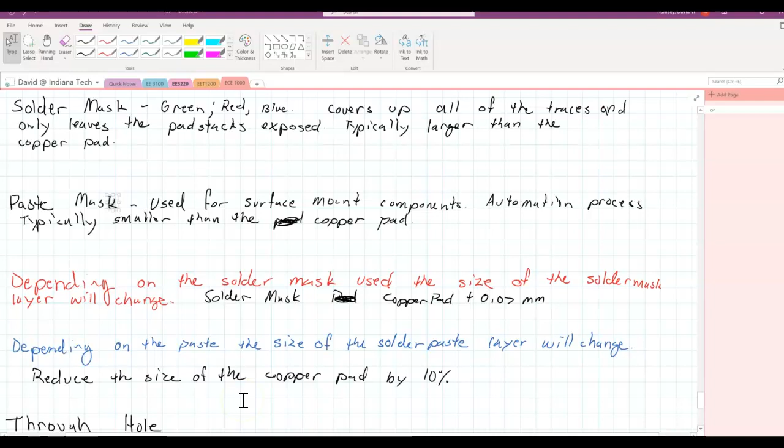Okay, so this last video for this week, we're going to actually look at doing a pad stack for a surface mount component. Now, there's one thing that I need to fix. I made a very critical error when I talked about the naming convention. So hopefully you're watching all the videos.

The naming convention here, I forgot that the way that it actually works here is that, let me scroll back up here a little bit. And I'm going to write tiny here. It's plus capital H plus hole diameter. Because otherwise, the reality is these numbers run together and it can lead to confusion. So the reality is this should have been 150H90 is what it should be.

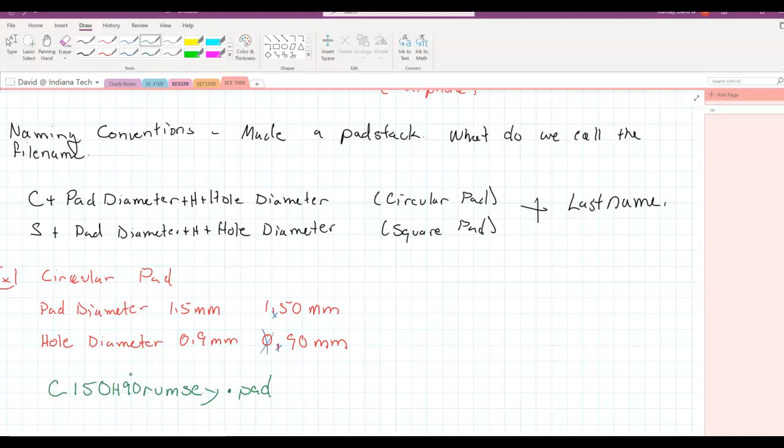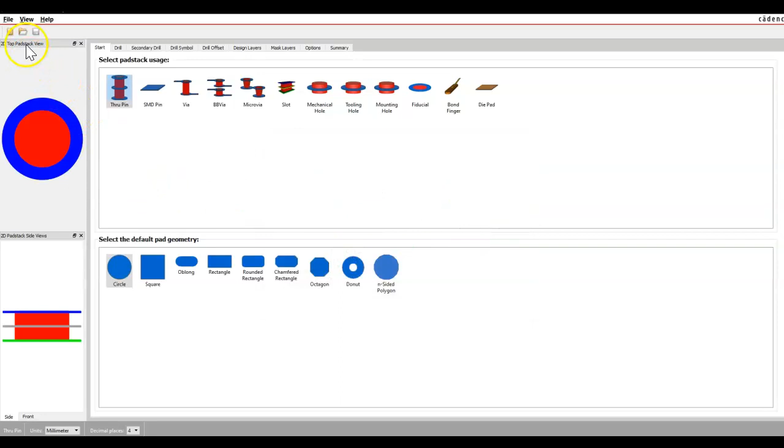And so for the one that we just made, if I open my pad stacks, where are my pad stacks here? The one that I just made here starts with a C. This one right here. I should have named it as C130H, and they say capital letters. It doesn't really matter if they're capital or lowercase in reality, but C130H90.

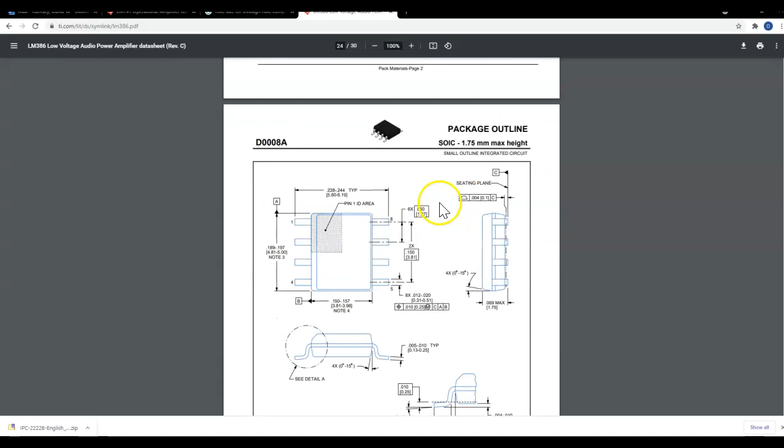Okay? So now, as I said, what we want to do is we want to now get on to doing surface mount components. Now this data sheet is actually for an LM386. This is a really good data sheet. Gives us a lot of examples here and a lot of information. Because actually, if I scroll up, this is actually the dimensions of the component. But that's why I like to look at everything, because if I scroll down a little bit more, here's even an example board layout. And so it says land pattern example.

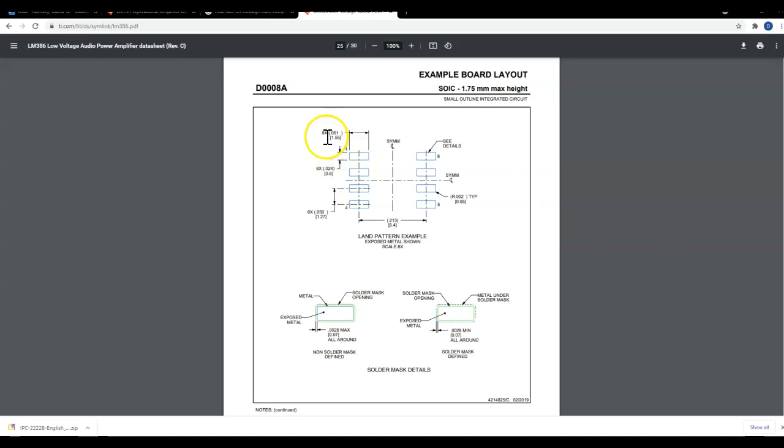So exposed metal shown. And so these basically give you precisely what it is. And this 8x just means it's 8 times, meaning that each one of these are the same dimension. And 6x, well, that's because there's 6 of these dimensions in here. So we also need to make sure that we see linear dimensions are in inches and then brackets are in millimeters. Okay. So we're going to, again, use millimeters for this pad stack. So I'm going to go here and I'm going to do a new.

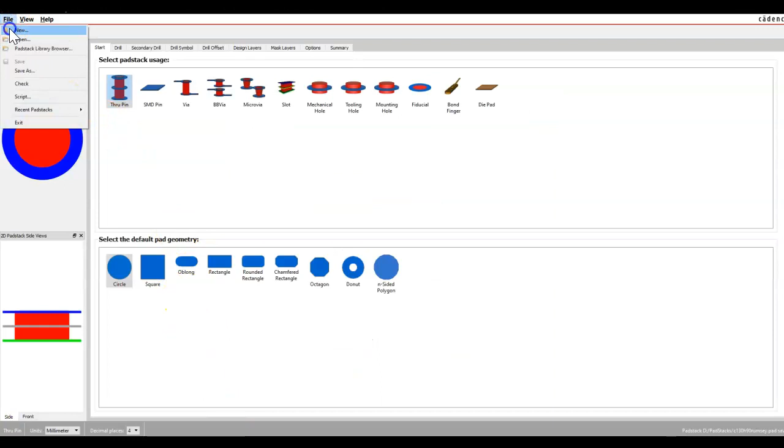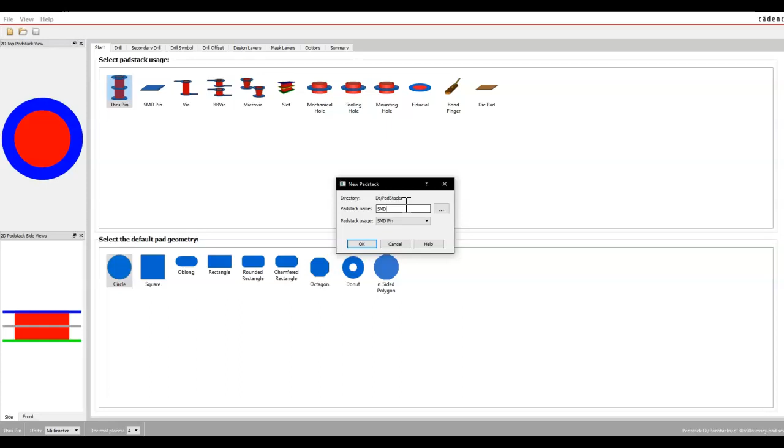And by default, pad stack usage, all that does is it's just going to select this for us automatically. Now, for an SMD component, it's SMD, which stands for surface mount device, and then the naming convention that we're going to follow here is we're going to do the width of it, which is, well, I should be careful, it's almost always this longest side, and then the height here.

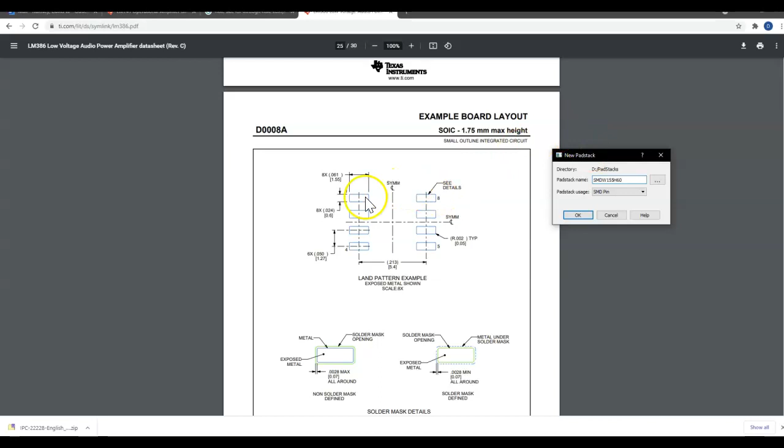So we're going to do SMD, W for width, 1.55, sorry, 155, height 60, because it's 0.6. I'm just reading that directly off the data sheet. So width 155, height 60. I'll double check that standard just to make sure, but I'm fairly certain that's the standard naming convention for a surface mount pad.

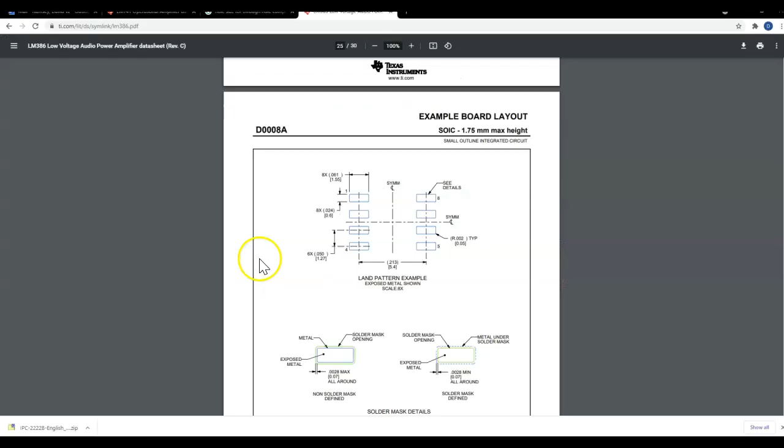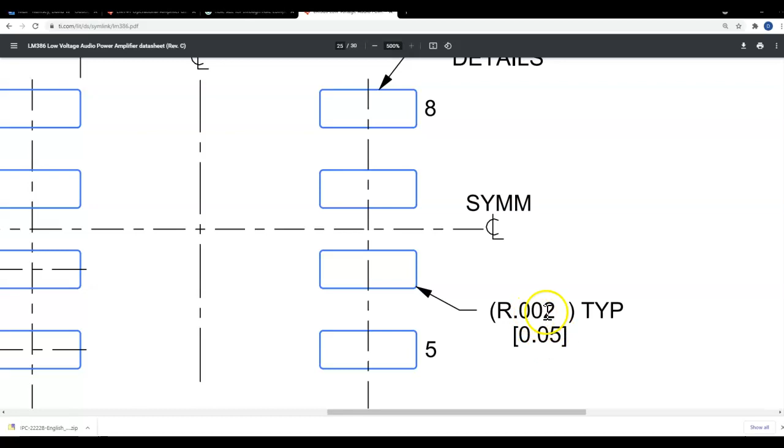So if I go to my pad stack editor, I now add a normal pad here, and you can see, oh yeah, it's literally just moved it here to this SMD. And default pad geometry, again, in this case it's rectangle, or you can actually do a rounded rectangle. And it actually is a rounded rectangle, and you can see that it's rounded if you zoom in. But it also gives you this here, R, which stands for the radius, and it's 0.05 millimeters, or 2 mils. So it's not really a rectangle, it's a rounded rectangle. There's reasons why we want that.

Drill, well, by default, there shouldn't be any drill. So there's none. And that disables these 3 tabs here. And then we just have the design layer. And you can have adjacent layers, but really for surface mount components, there's really just the top layer. So begin layer, it's rectangular, go away, rounded rectangular. Now this is, again, the copper. And so remember, what was the width here? Just going back here. The width was 1.55.

Again, make sure that your units are in millimeters. Mine are in millimeters because I didn't close the program out. I've been using the units of millimeters, so that's the reason it's staying as millimeters. But if you started the program up, make sure that you're in millimeters. So my width is 1.55, and then my height is 0.6. And so, yeah, it looks like a little rectangle.

But now the corner radius, because remember it's rounded, is what they're recommending. And the rounded here is 0.05. And you can see now it nipped off the little corner there. Now typically for SMD components, we do have rounded pads, and there's a reason for having the rounded pads, but I'm not going to go into that reasoning. I don't want to say it's complex, but it's just not worth going into right now on why we often use rounded pads as opposed to rigid square pads.

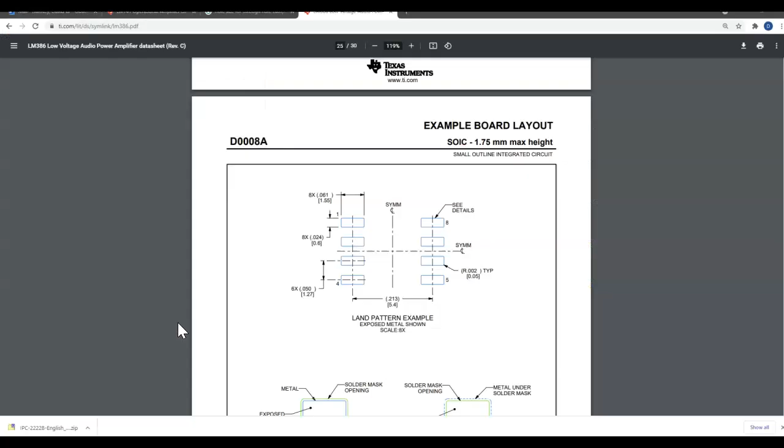Well, I'm really almost done now. I have my mask layer, so I have my solder mask top, and remember, now it has solder mask bottom, but we're only having top here. So solder mask top, I may as well do rounded rectangle again. Now what is this? We said to add 0.07 millimeters. Well, let's look at the datasheet, because the datasheet actually has a solder mask opening that they are recommending. And look at what they say, 0.07 all around. Now, that's not where I got the 0.07. I got the 0.07 from the standard.

But it is interesting that, well, of course, they're following the standard as well, and they're putting it in there. And you can see here, IPC publication, and it's giving a note, may have alternate designs. It's following the IPC standards. So that's what we're trying to teach here, is these IPC standards. Now, I'm not going to test you on the standards, but being exposed to those standards is actually very useful.

I mean, you can actually put that on your resume that you've learned about IPC standards. I wouldn't say that you're an expert at them, but you could definitely put that as a skill, especially if you're looking for an internship, because you can get internships where you're doing PCB layouts. Actually, you can make a lot of good money just doing this PCB layout stuff as a full-time job.

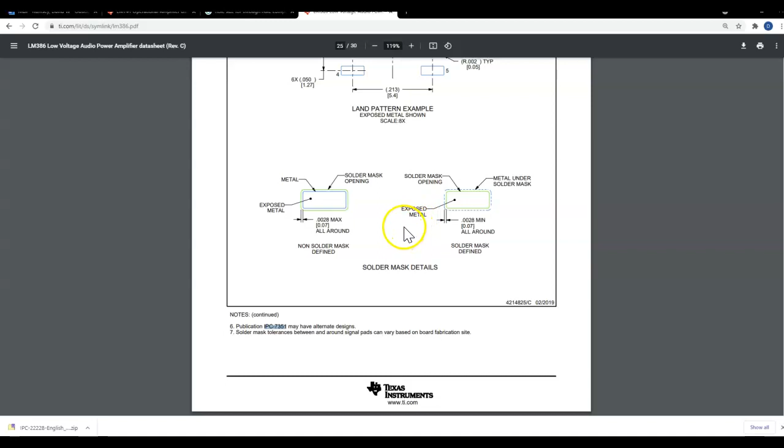We have a graduate from Tech. I don't want to say number of years if I use this video again. It's 2021. I think he graduated in like 2015 or 16. In any case, it doesn't really matter that much when he graduated, but this is what he does for a living. And so you can really make a good living doing this.

Now going back here, 0.07 all around. Okay, well, we know here, my design layers, I just add 0.07. So 1.55 plus 0.07, if I do my math correctly, this would be 1.62. And then the height would be 0.67. And then the corner radius stays the same, we've got a corner radius of 0.05.

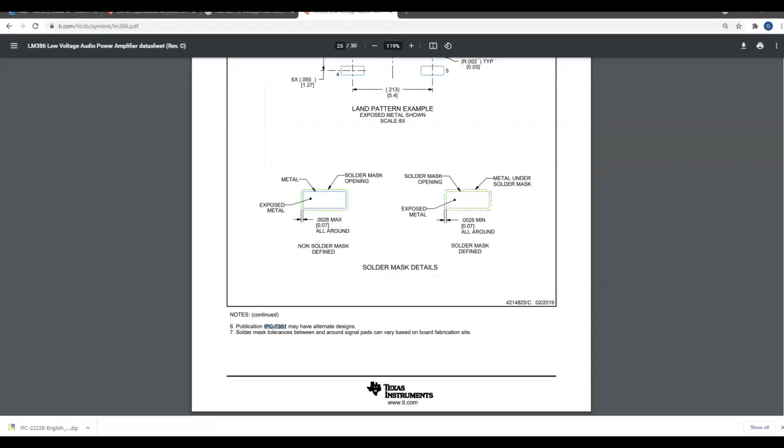And the other thing you can notice here is you can actually determine if you want the corner radius on all corners, or you can take it off a corner, put it on. Now we actually have to do the paste mask top. Now I said the rule that we were going to follow is 10% lower. But let's go to the data sheet here that we've been looking at, because it actually also has what it considers a solder paste example. Now it's giving the exact same dimensions of what the land pads are.

This is where sometimes it's not good to do this, and it's basically saying, notes, laser cutting apertures with trapezoidal walls and rounded corners may offer better paste release. IPC 7525 may have alternate design recommended. Board assembly site may have different recommendations for stencil design. That's basically where these boards are getting built, where these are being manufactured.

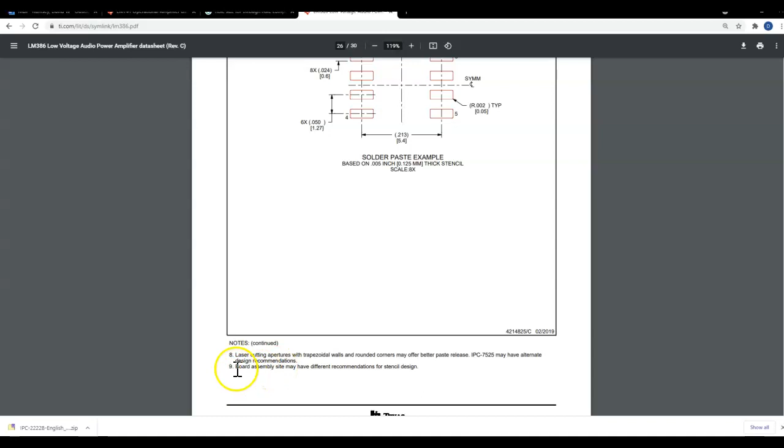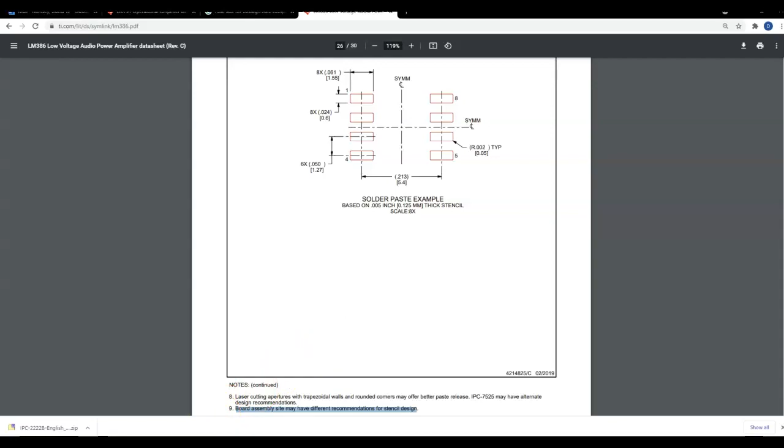And when I was working for the company I was working for, that was where I got the 10%. As I said, it's not necessarily standard. It was what my company used for the solder paste stencil, to reduce the dimensions by 10% roughly. So if I pull up my calculator, I have 1.55. Let's just multiply that by 0.9 because that's a 10% reduction. 1.395. I mean, that's kind of a little silly, but I may as well put all those things in here. 1.395.

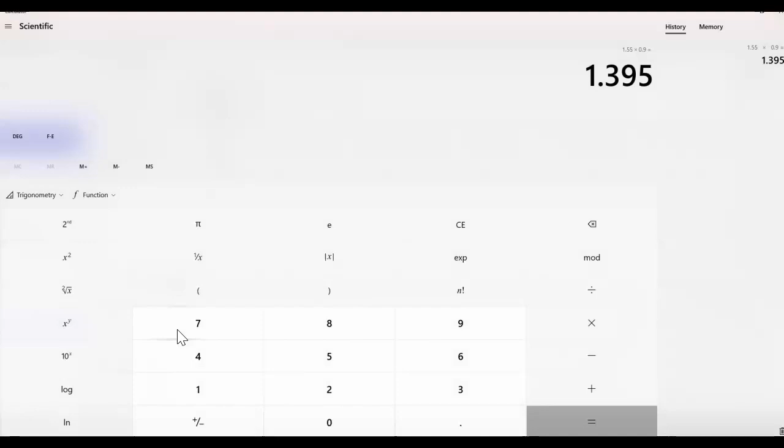And then it's 0.6. 10% reduction would give me 0.54. And I will go ahead and keep the rounded corner in. And then there's nothing again on these bottom layers. And so I'm ready to save. And I had already given it a name. Now, the naming convention I gave here is fine. SMD, surface mount device, width 155, height 60. But just like the other ones, we should tag our last name onto it when you're turning it in, so it's easy for me to see who it is that is turning it in.

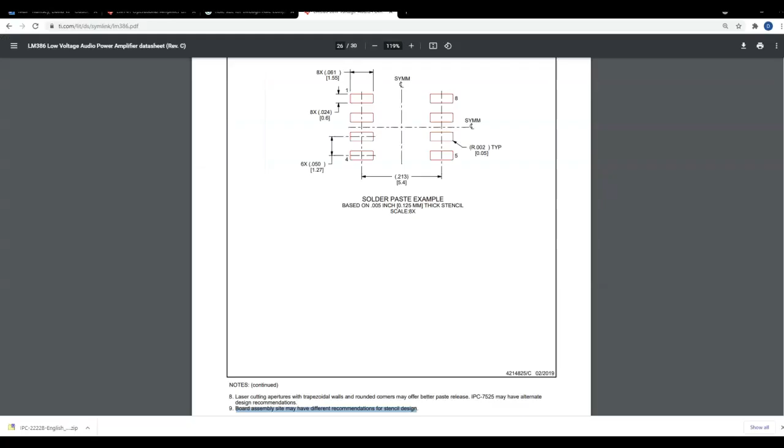So really, it's not hard to make these pad stacks. You have to look at the data sheet and then actually make the pad stacks based off the data sheet. So for your homework assignment, there's going to be a couple data sheets I upload, and you'll have to create pad stacks for the particular components there. Now, I'm going to scroll through this data sheet just a little bit before I end, because this actually has more than one type of package.

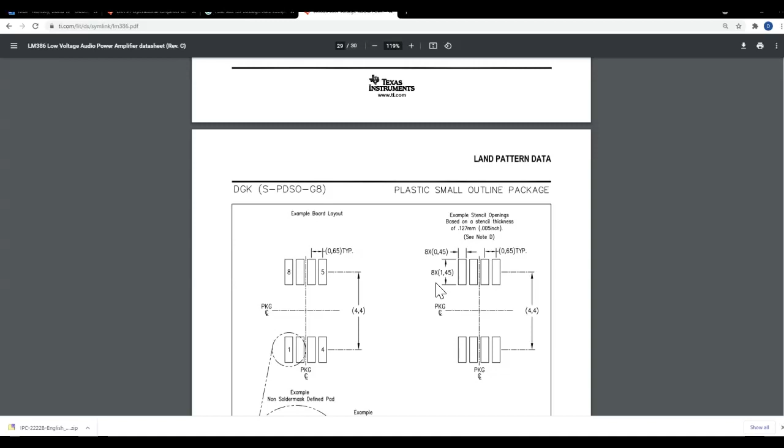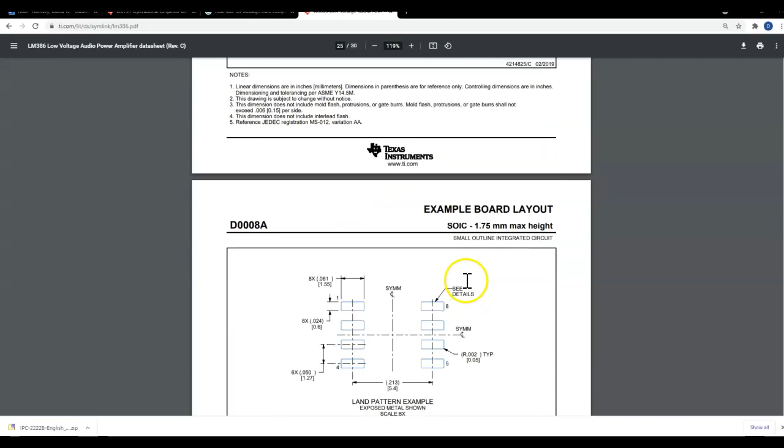So if I scroll up here, this first one was what's called an SOIC. That's a small outline integrated circuit, I'm fairly certain that's what this stands for. And then DIP, which is dual inline package, which is the one we did the other.

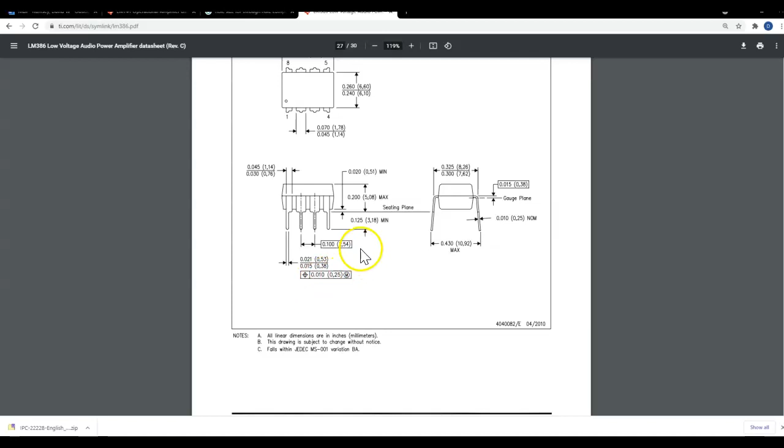Now the nice thing is these are standard. If you look here, this was a different data sheet we were looking at, but it's still the same, because these packages are standardized, so that once we get a pad stack set for this package, we'll be able to use that pad stack for any other component that has this type of package.

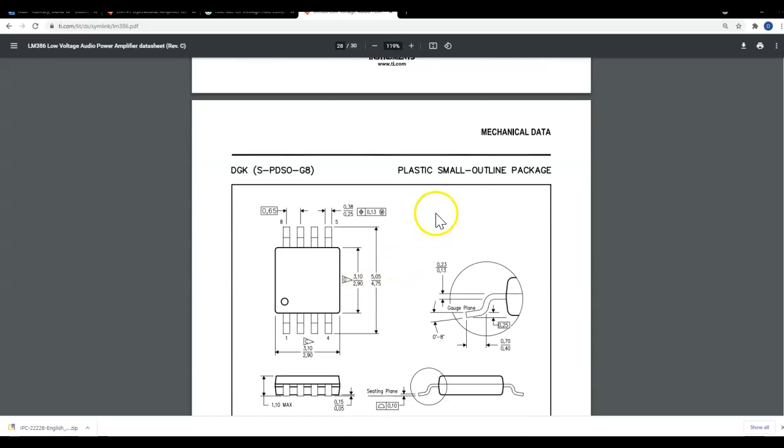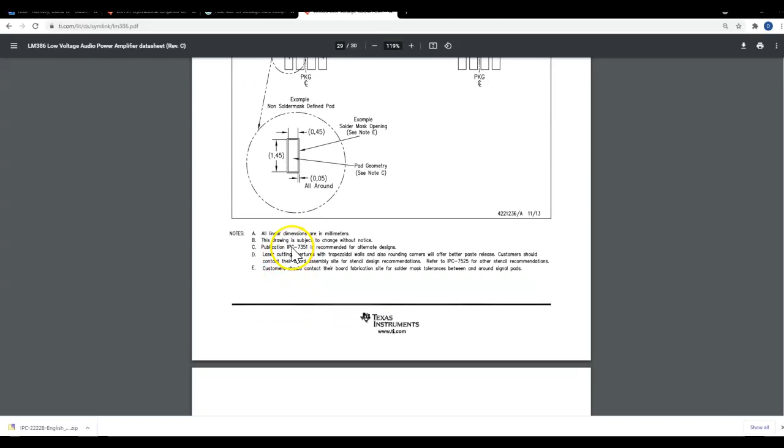But then we also have this plastic small outline. And if we go to the plastic small outline, there's different geometries, and it says, See Note E and C, and then there's some other things here. And again, look, IPC. So there's 3 different packages there. So when I upload the data sheets, I will make sure to indicate what packages you need to do the landings for if there's more than one package. All right.

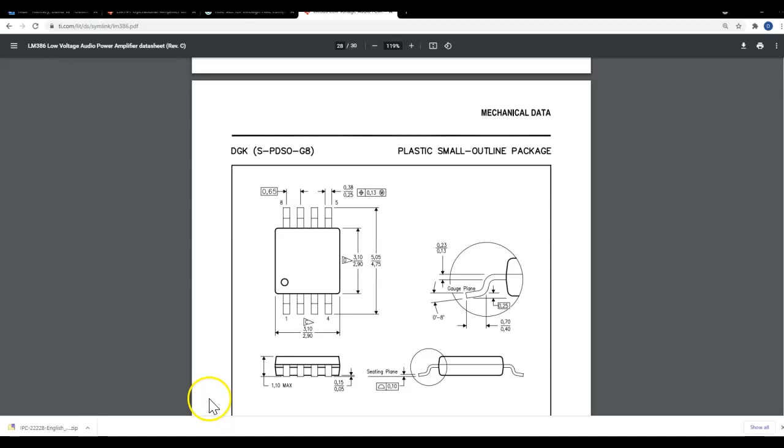So then after this, next week we're going to start getting into actually creating the footprints. But we'll also be posting our first project as well. So be looking out for that soon as well.